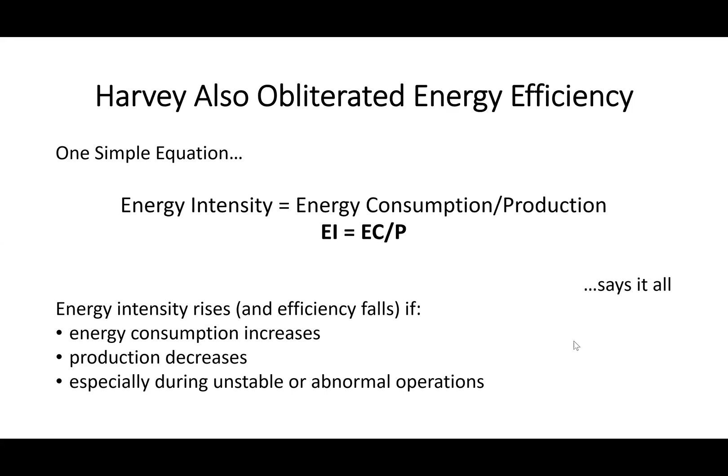We started this presentation with my Harvey story, and then we got technical with the definition of energy intensity. I'd like now to lay out the agenda for the rest of this talk, and we'll start with some examples, some detailed examples of how energy intensity is affected by disturbances in the plant.

First of all, looking at summer rainstorms as an example, and then talking about some throughput cut situations and the impact that those have. We'll then move on to some other situations more generally, and then move on to see how this applies in the case of Hurricane Harvey and other major natural disturbances that might occur. And then we'll wrap up with a brief discussion of some ways to mitigate these effects and have less of an impact on energy intensity.

As we go through these examples, you'll see this little table come up a number of times. And here we're looking at the three parameters we talked about in our equation. First of all, the EC, which is energy consumption. Secondly is production rate, P. And then the third one, EI, is the energy intensity. And we'll be looking at how each of these changes in each particular example that we look at.

The red obviously means a bad change. So energy consumption going up is adverse. Production going up, on the other hand, is a good thing, and energy intensity going down is also a good thing, so those are shown as green. So, moving on with our agenda, we'll turn to the detailed examples that I mentioned. And the first of these is the summer rainstorm.

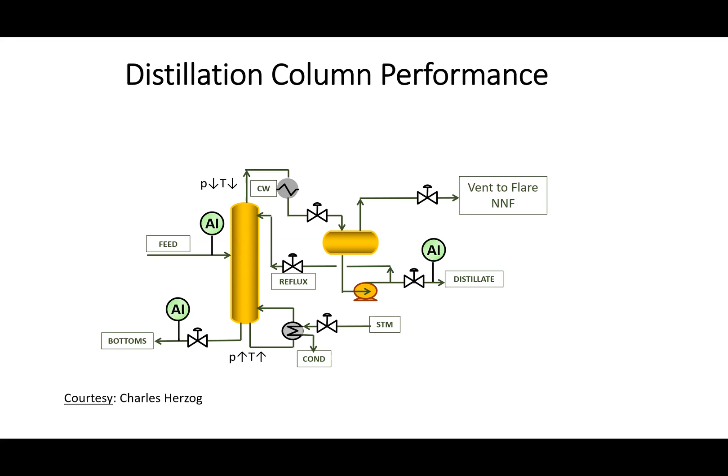Now, let's consider what happens when there is a heavy rainstorm. In many distillation columns, the overhead equipment is not insulated, so the pipes and equipment are cooled rapidly by the rain. This increases the rate of condensing, which causes the pressure at the top of the column to fall. This, in turn, causes more material to vaporize inside the column and go to the top. This includes some of the material that is supposed to go to the bottom.

Consequently, the overhead composition changes and it can go out of specification or off spec, and it may take many hours to get it back on spec. This often means that we have to reprocess the overhead product. In other words, distill it again to get it on spec.

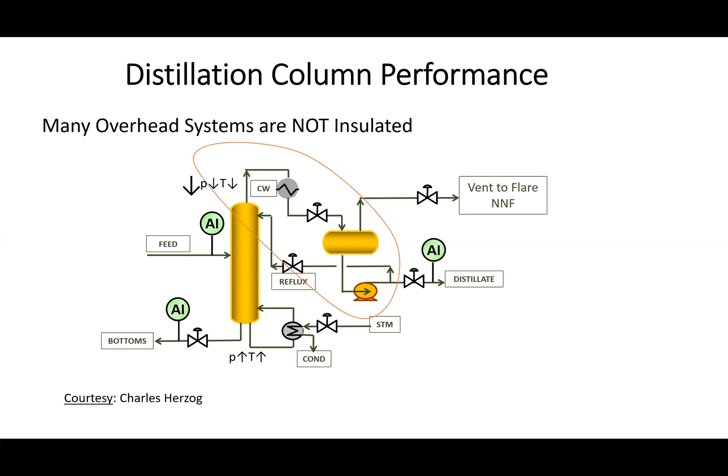And then just to summarize this, when we have our rainstorm, we get an uncontrolled increase in the condenser duty. The pressure at the top of the column decreases rapidly. The liquid on the trays vaporizes more than it normally would, and this additional vapor goes to the reflux drum, and the composition of that vapor is not correct.

It contains more of the heavier materials than we want in the distillate. So these heavy ends contaminate the distillate product, and so we are left with an off-spec material, out of specification, and this then has to be reprocessed.

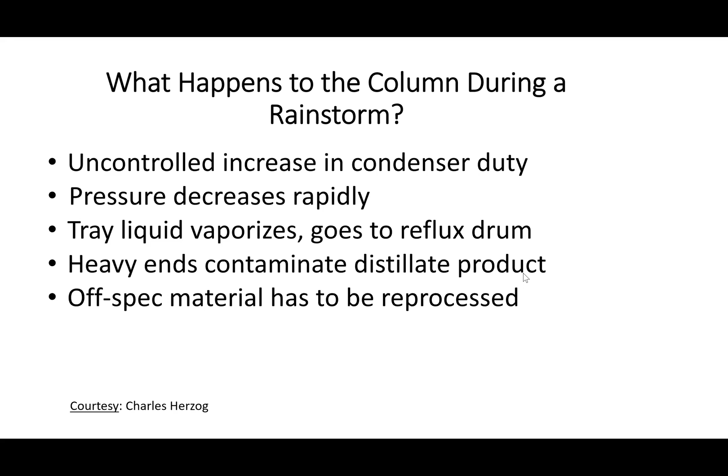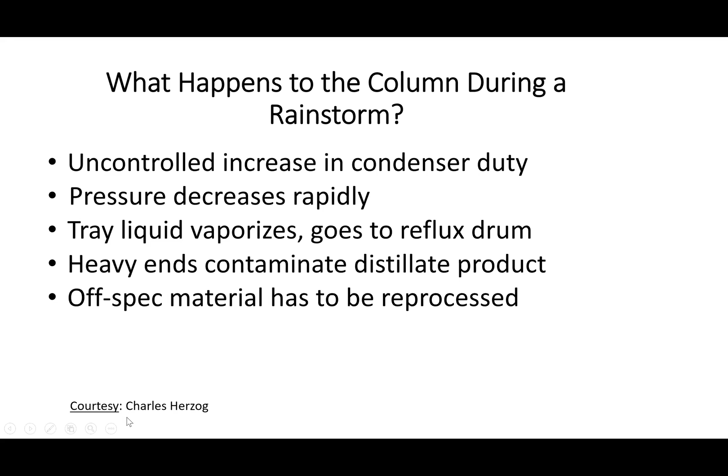So what this means is that in order to get back to the composition that we wanted for our overhead material, we basically have to distill it a second time. We have to reprocess it. So the effect, if we go to this table that I talked about, is that the energy consumption goes up because we're having to distill this material twice over.

Moreover, our production has gone down because time has been effectively wasted distilling this the first time. And so the overall effect is a double whammy as far as energy intensity is concerned, more energy consumption over a longer period of time, meaning that production per unit time has gone down. And so the energy intensity is significantly increased.

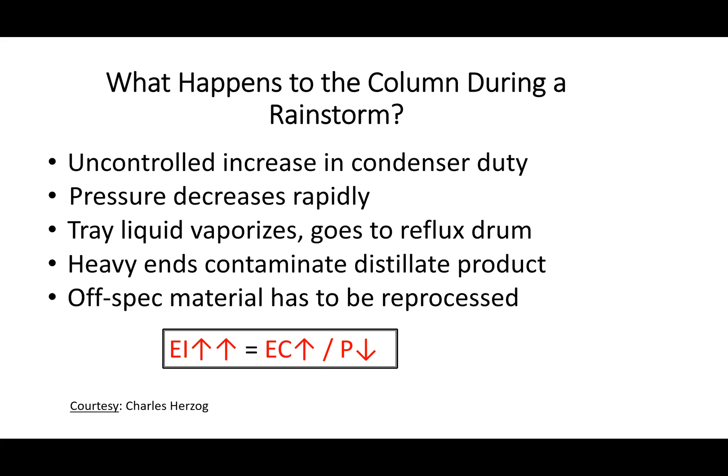All right, let's turn now to our second example, which is throughput cuts, or ways that we reduce the production in our plant by changing flow rate. And I'd like to focus on centrifugal pumps, which are one of the most common pieces of equipment that you'll find in most refineries and chemical plants. And specifically, I'd like to look at 3 different ways of controlling centrifugal pumps, which have different impacts on the energy intensity that results from flow reductions.

The first type of control I'd like to talk about is generally called bypass control, although I personally prefer the term spillback control or even recycle control because I think it actually gives a better concept of what's really going on here. And the idea is this: you have a certain feed stream that you're passing through your pump. It comes out on the discharge side, and you take a portion of that flow to the downstream user of that stream. But the other portion you simply return back to the suction side of the pump through a spillback line.

Now, many companies or many consumers like this design, this configuration, because it actually can give you a very stable and steady flow to the user. However, it does have significant disadvantages, as we'll talk about later. Another thing I should comment is that there are actually a number of different variations on this configuration. One of the most common I've seen is what I'm showing here, that we take the spillback from the discharge side of the pump and return it directly to the suction line.

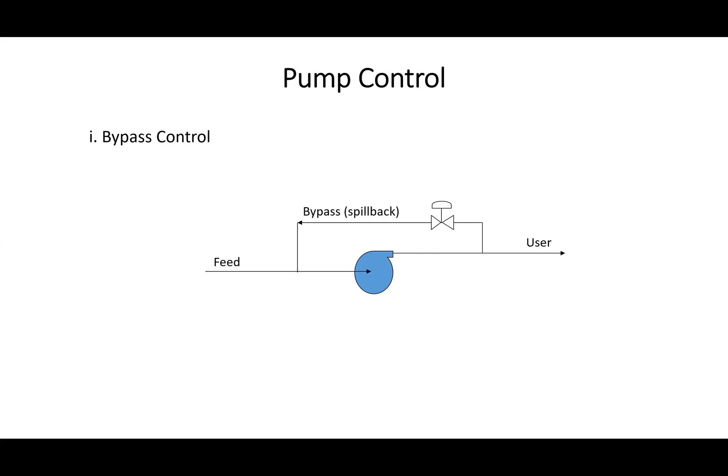Let's now look at the material balance here. We are trying to deliver a quantity of flow F to the consumer on the right-hand side of the diagram. On the left-hand side, we must provide that same quantity of feed, big F, on the extreme left-hand side of the pump. We're controlling the flow by adjusting the spillback flow, little f, and that spillback mixes with the incoming feed upstream of the pump to give a combined flow through the pump of big F plus little f.

And when we look at this diagram, the flow little f simply circulates around and around. It does not contribute to the net flow through the process. And so let's suppose that we want to reduce the flow, big F, going to the downstream consumer. Well, we do that by opening the spillback valve, which means that little f must increase.

Now, there's virtually no change in pressure at either the suction or the discharge side of the pump, and the pump speed is constant. So the flow through the pump, which is big F plus little f, also stays the same. Any decrease in big F must be equal to the increase in little f. Consequently, the power requirement or the energy consumption within the system remains the same.

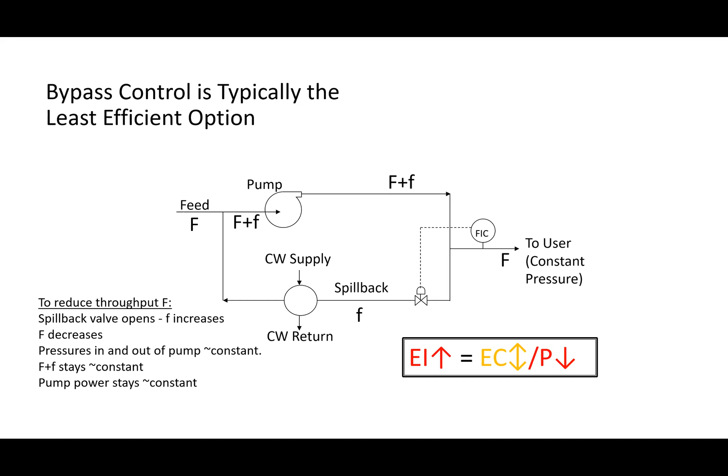Well, now I'd like to show you a couple of other control mechanisms for pumps, flow control mechanisms. And the first one is what is called throttle control. And here we put a throttle valve on the discharge side of the pump in the discharge line. And as we close that control valve, so we throttle, the flow goes down. And there will generally, when we do that, be a reduction in the pump power requirement.

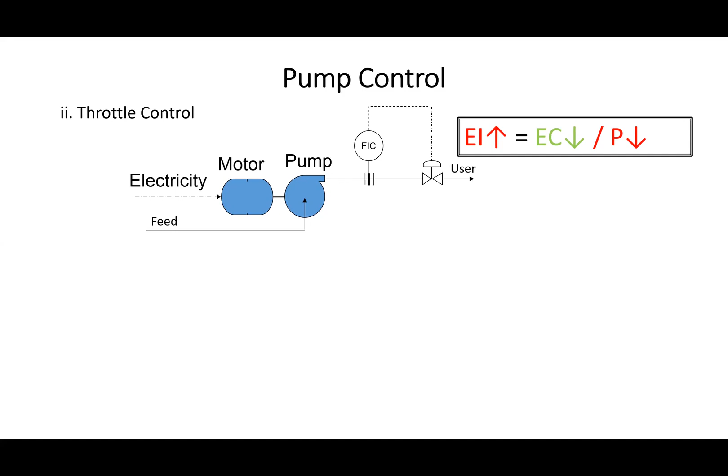However, that reduction, the percentage reduction in the pump power, is almost always a smaller percentage than the reduction in flow rate and the corresponding reduction in plant production. So the net effect, the energy consumption goes down, production or flow rate goes down, and the energy intensity goes up. This is, however, better than the situation with the bypass control or spillback control, because we do at least get some reduction in energy consumption.

The third example that we have is speed control, and this is usually accomplished with a variable frequency drive in the case of electric motors. Generally, an electric motor will run at constant speed, and so the pump will also be running at constant pump speed, and so we have to use valves to control the flow.

When we use a variable frequency drive, we can actually reduce the pump speed in order to reduce the throughput or the flow rate. And that then means that, yes, once again, energy consumption goes down as flow rate or production rate goes down, but in some cases, the energy intensity also goes down. In other words, the percentage reduction in energy consumption may, in some cases, be larger than the percentage reduction in flow or production.

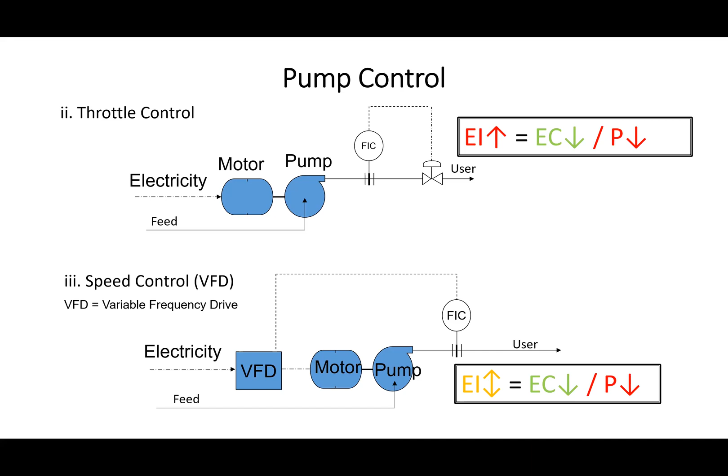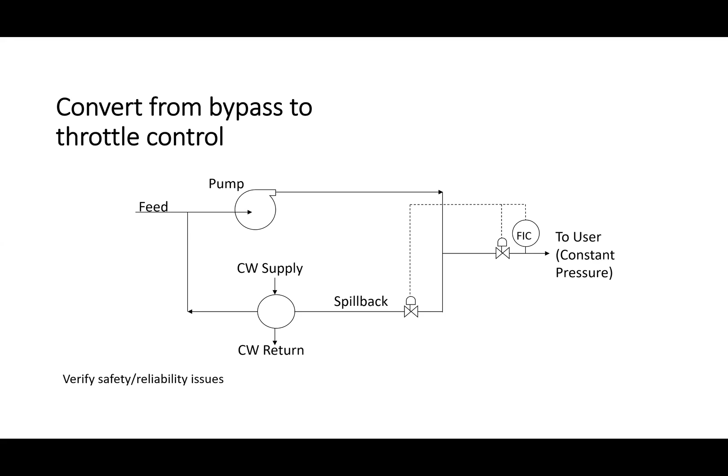The example I showed you earlier with the bypass control or spillback control was taken from an actual energy assessment that was carried out a few years ago. The recommendation from that study was to add a throttle valve on the line to the downstream user of that material. And this then allowed a significant reduction in the flow going through the spillback line. And the savings were in the order of $150,000 a year, which was quite significant.

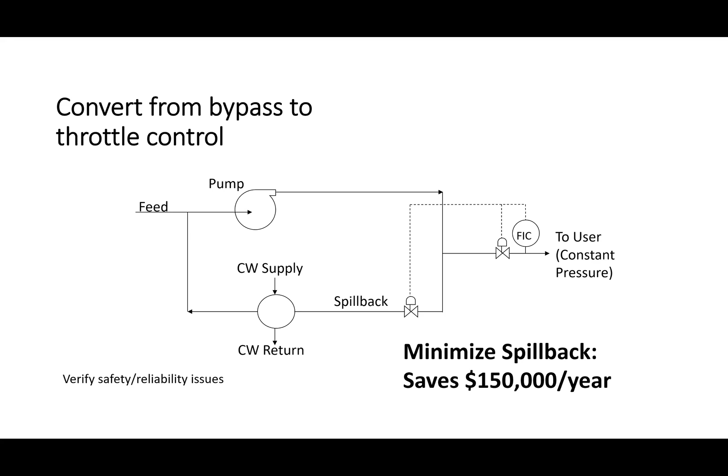You still need to have the spillback line available, however, because this is a mechanism for ensuring that the pump always has at least its minimum flow requirement and that it doesn't overheat. As I mentioned earlier on, that is a significant requirement in this situation. And this also raises a very important point. Whenever you try to change control systems, it's very important that you consider the safety implications and reliability implications of any changes that you make.

Well, I'd like to turn now to talk about some other situations where we see significant increases in energy intensity due to changes in operating conditions. And I think the most significant example is shutdown and restarting of plants. While a plant is actually fully shut down, it's offline, there is no production. But even in that situation, there is always some amount of energy being consumed or wasted within the plant. So in that situation, we have our denominator going to 0 while there is a finite numerator. So of course, in that particular period of time, the energy intensity is actually infinite.

During the period when you're shutting down the plant and subsequently restarting it, well, that can take several days in some cases, but during that time we are consuming a considerable amount of energy. For example, during the shutdown period, you may be cooling down equipment in a controlled manner, and then on restart, you may be reheating furnaces and other equipment, for example, using energy while you're actually making very little usable product.

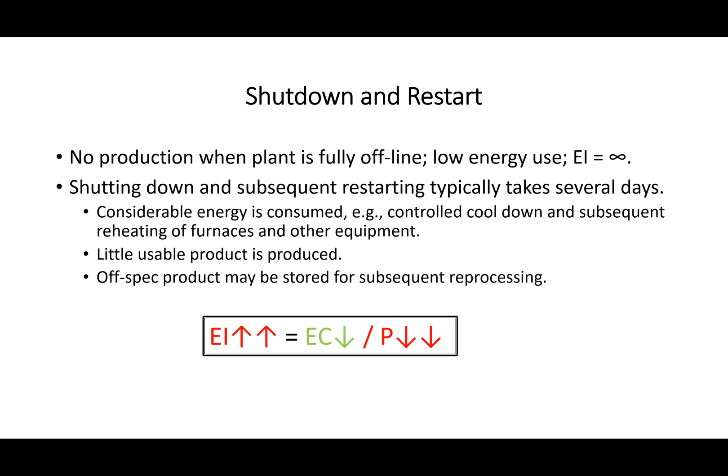And you may also end up with off-spec product, as we discussed in an earlier example. This then has to be stored for subsequent reprocessing. And so the result is, even though your overall energy consumption may be less than it would be during normal operations, your net production is way down, and the energy intensity may not actually be infinite, but it's certainly much higher than normal.

And I'd like now to talk about just a couple of other cases. So one situation is what you might call a partial shutdown, or often called a squat. And this is commonly used for maintenance activities or to recover from major plant upsets. And in this mode, certain pieces of equipment within a plant will be shut down. Other pieces of equipment will be in a standby mode, so they can be run at low load and put back into full production quickly while the rest of the plant runs.

And so overall, you have a situation here where there's obviously some instability in the operation, but also you are producing significantly less product than you normally would from your plant. And the overall effect is an adverse impact on energy intensity. There are also many plants that make a multitude of different products or different grades of the same product.

For example, polyethylene, there are many different grades of polyethylene. And whenever you change from one grade to another or one product to another, you will have to do some or all of the things that I list on the slide here. You may have to stop or start pieces of equipment, or maybe the whole plant in its entirety.

You may have to change feedstocks or adjust temperatures and pressures and flow rates. And all of these will lead to some disruption to the operation. And as we've seen from previous discussions, this will also lead to an adverse impact on energy intensity.

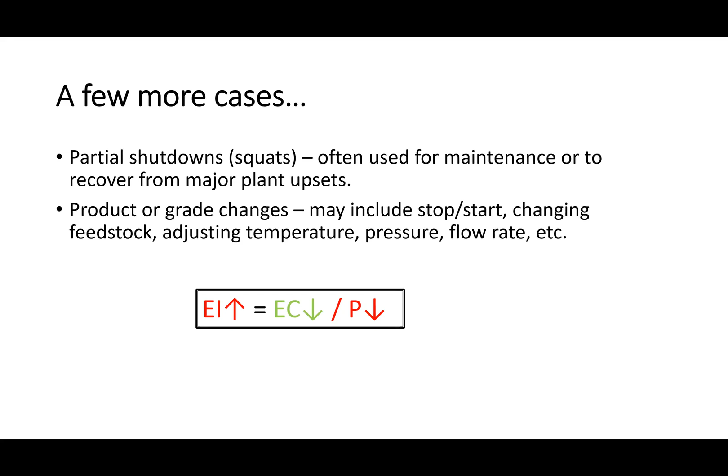Well, how does all of this apply to Hurricane Harvey? I think it's fairly clear that pretty much everything we've discussed does have an impact in situations like hurricanes and other major disturbances from natural causes. For example, we talked about rainstorms and their impact earlier on. Clearly, when a hurricane comes in, you get rain.

You will also have to stop equipment or put equipment in standby mode. But typically with a hurricane, most plants will end up being shut down to protect them and to protect operators. And there will then be an extended period being offline and then restarting. And as we saw from our discussion of plant shutdowns, these activities all lead to an adverse impact on energy intensity.

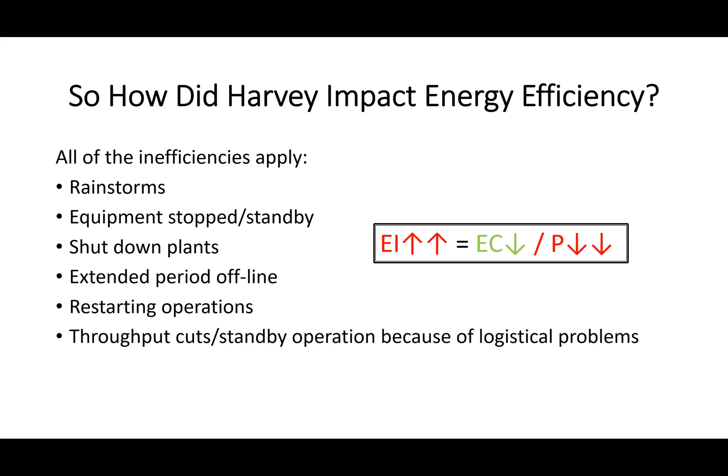And then even when you come to the final startup of your plant, with a hurricane like Harvey, there is some disruption to the surrounding society, the surrounding infrastructure, and this can result in cuts in your throughput or instability of operation because of problems in the supply chain. And so this also will have a significantly adverse effect on energy intensity and energy efficiency.

Well, what can we do to mitigate against these problems? Well, obviously, it's a whole different story dealing with a small disturbance in flow rate or composition in the normal operation of a plant and dealing with a hurricane, very different situations. And so not everything that I list on this page is ultimately going to be useful to you in a hurricane, but it will tend to be helpful in general in improving the resiliency of plant operations.

And there are a number of different areas to look at. We can consider the design of our plant. We look at operation, and then also we need to consider external issues outside of your battery limits and the overall infrastructure and environment in which you're operating. So on the design side, the better insulated equipment is, the more resilient it is against fluctuations in external temperatures and rainstorms, as we saw in the example of the distillation column earlier on.

Surge capacity within surge tanks, feed drums, product drums, and so on can help to deal with changes in flow rate and composition. And there are ways that control systems can be improved also to manage disturbances. From the operational side, we talked about plants where we change grades or products, and the less often we make those changes, the less disturbance there is. And so if you can go for longer runs with each product or each grade and fewer transitions between them, you will tend to improve the energy intensity of your process.

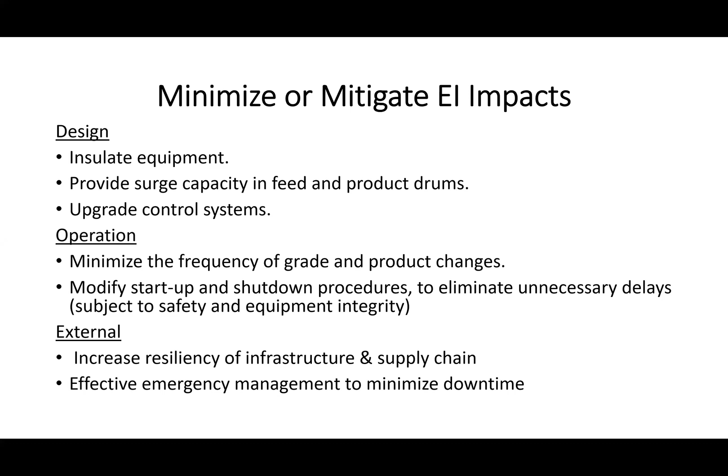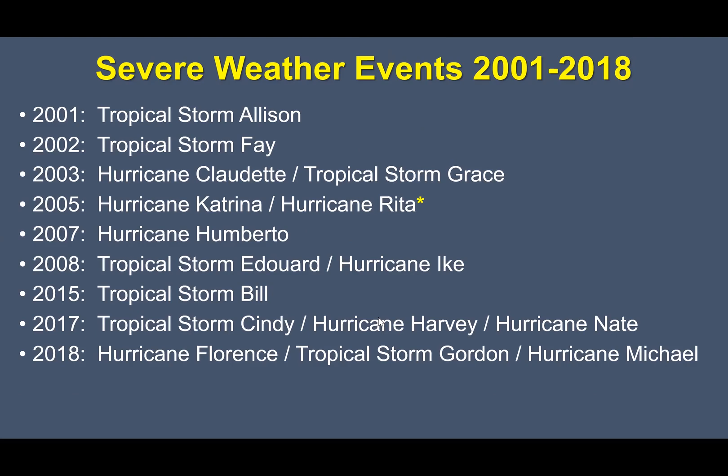All right, so this was just listing severe weather events. But now we come to, I think,

Harvey was different because it challenged us in every way possible. Our major facilities in the storm-impacted areas were essentially isolated because of floodwaters. Coast Guard men and women across our service and at every level displayed remarkable initiative and innovation, overcoming many, many obstacles. We were able to get in that morning prior to sunrise, and due to the low ceilings, we were having to fly at times as low as 100 feet, flying in between light poles on highways, flying over power lines.

The day always started pretty early. We would have our morning meetings to figure out what we're going to do that day, where we're going to try to get to. Coast Guard, anyone out here? And then we were out on the water the rest of the day, wading through water that was chest high. And we stayed out till 7, 8 o'clock at night, dry off, and go to bed for the night to get up and do it again the next day.

This was a high-risk operation. They are saving lives in the middle of tropical storm force winds and torrential downpours. Our main mission was to protect the asset. We left the pier and anchored out in the Houston Ship Channel, dropping both of our anchors and two 12,000-pound sinkers over each side of the buoy port on our ship.

We were taking upwards of 1,000 calls per hour. There were more than 26,000 calls received. What we would end up doing is going out, picking up as many folks as we could until, by policy, they were no longer allowed to even keep flying. So people were really pushing their limits.

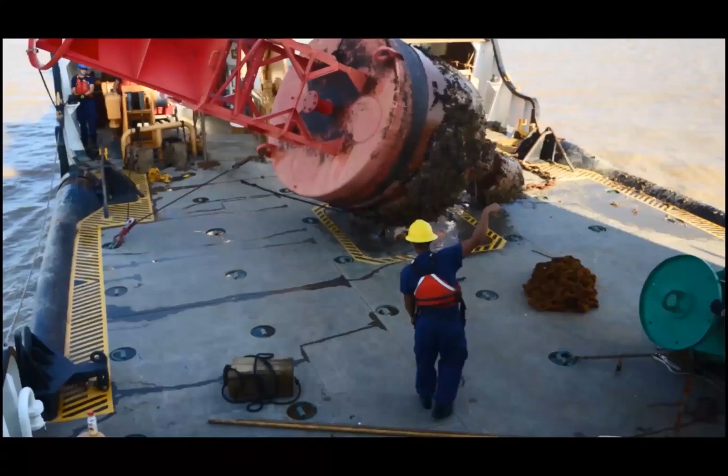And while our Coast Guard crews directly affected the rescue of more than 11,000 people in that time period, using our facilities, our command and control capability, and the on-scene initiative that defines our enlisted workforce, Coast Guard men and women directed and facilitated the rescue of tens of thousands. Even before the storm cleared Texas, our crews were on the water, working with partner agencies to restore critical channels and aids to navigation, and to ensure the port facilities were able to safely receive ships and start operations here in the Port of Houston and throughout Texas. Those efforts ensured that the area refineries not severely damaged by the storm were able to receive feedstock and continue to operate. In the weeks and months following the storm, Coast Guard women and men responded to more than 670 pollution sites and removed over 58,000 gallons of oil and more than 8,500 pounds of hazardous material that were spread through coastal Texas by the storm and the floods.

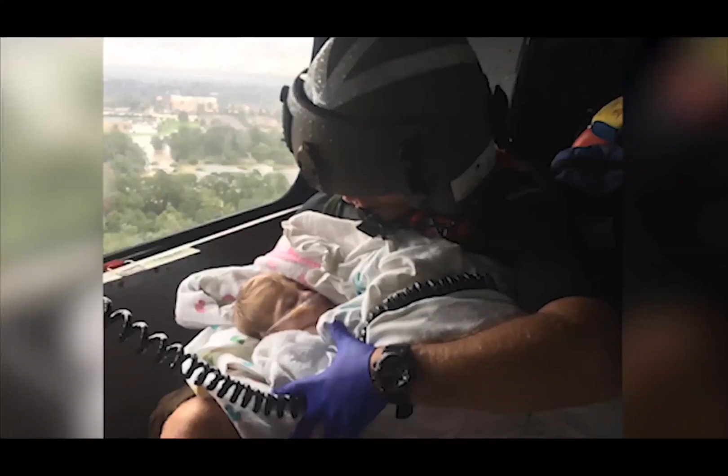As the commander responsible for Coast Guard operations in a 26-state region, including all of Texas, I'm tremendously proud of what our Coast Guard men and women accomplished in the face of this historic storm, even while many of them suffered damage to their own homes and property alongside their fellow Texans. Mr. Chairman, members of the committee, the men and women of the 8th Coast Guard District are proud and privileged to be members of the world's greatest Coast Guard, and we appreciate your continued strong support of our service. We continue to stand with Texas alongside Texans, ready for whatever comes next. I just want to thank all 4 witnesses and who you represent and everybody in the room who is a part of the response and recovery effort for your service to not only this nation, but to this great state of Texas.

All right, and yes, we certainly acknowledge the great work that was done by all the emergency responders during Harvey. One thing that I did discuss with Joe in preparation for this session was the aspect that a lot of what they did during that period was not simply to rescue people, but also to help restore the infrastructure of the whole region. And I mentioned earlier that disruptions to infrastructure often lead to delays in startups or long periods of running with disrupted supply chains. And that was an important part of the recovery from Harvey as well.

Had it not been for all the work done to restore and resuscitate, if you like, the infrastructure around the area, there would have been much worse impact on supply chains and therefore a much worse impact on production and energy intensity within the industrial sector. Let's just go to the end of these slides quickly. And so I think a lot also of Commander Leonard's message was the can-do attitude that enabled the Coast Guard and the other emergency responders to get things done.